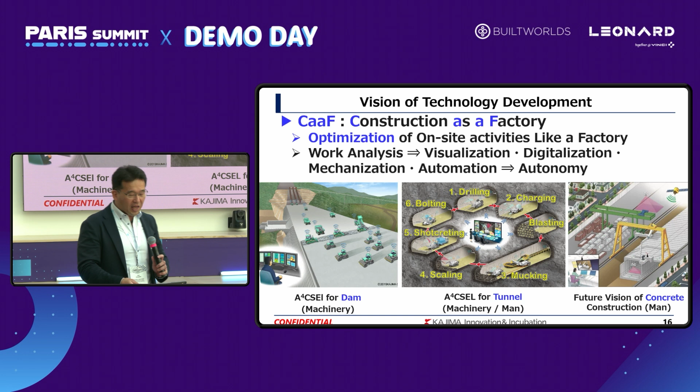For Kajima, automation is not just about replacing operators or reducing the number of people. It is about achieving optimization.

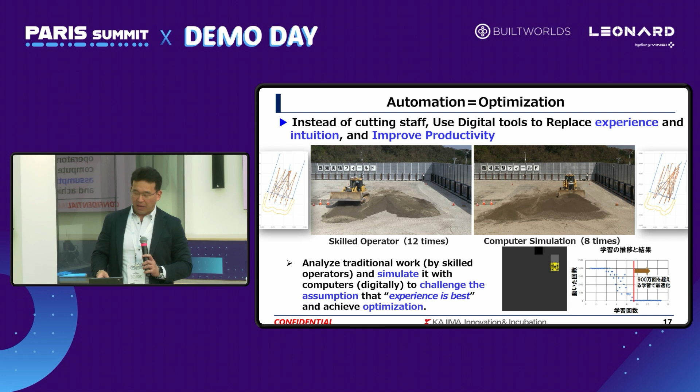For example, on the left side, a skilled operator is leveling a pile of soil, and it takes 12 passes to complete. On the other hand, on the right side, computer simulation accomplishes the same task in 8 passes. The belief that a skilled operator is the best can be challenged by computer simulation. In this case, productivity improves by 33%. This is the significance of automation.

So now let me talk about the next generation construction system, A4CSEL. A4CSEL means automated, autonomous, advanced, accelerated construction. Let me show this video. Please have a look at this.

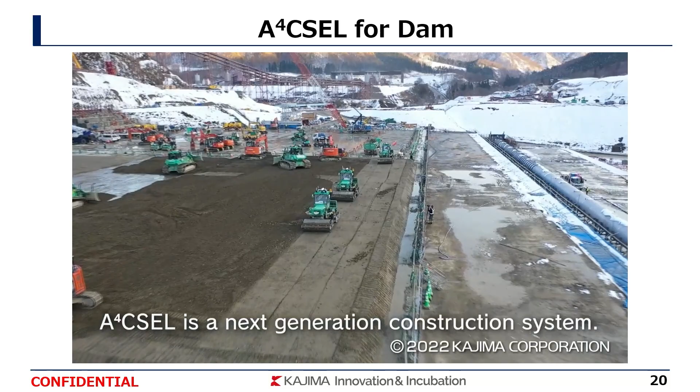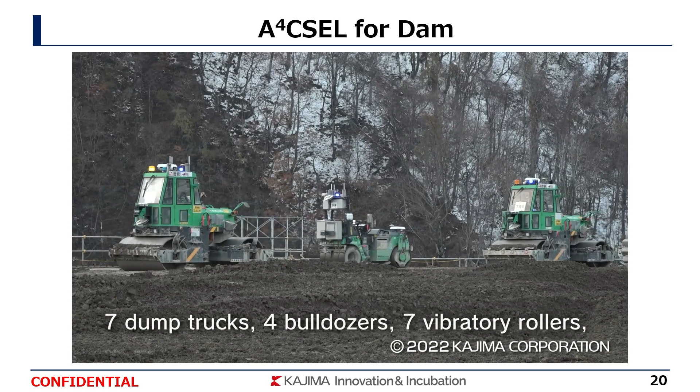A4CSEL is a next-generation construction system ensuring productivity, safety, and quality. Five different types of 23 automated heavy equipment units are used at the Naruse Dam. These heavy equipment units operate continuously, day and night. The world's first automated construction project is now underway.

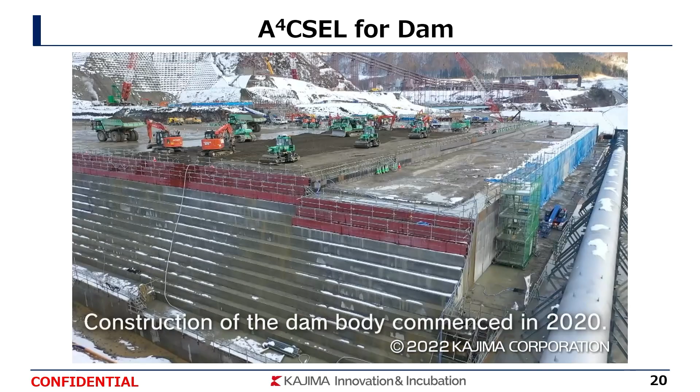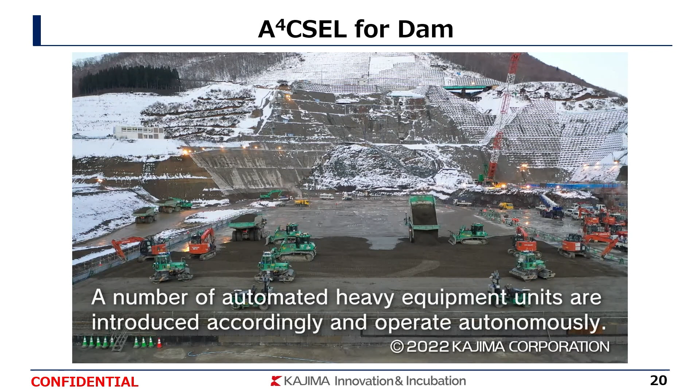The control room is the hub of automated construction. Dam body construction commenced in 2020. Automated heavy equipment is introduced in accordance with the construction process and operates autonomously in coordination and linkage with each other. Smooth construction with optimal technology maximizes productivity, and autonomous operation technology adjusts movement to meet site conditions.

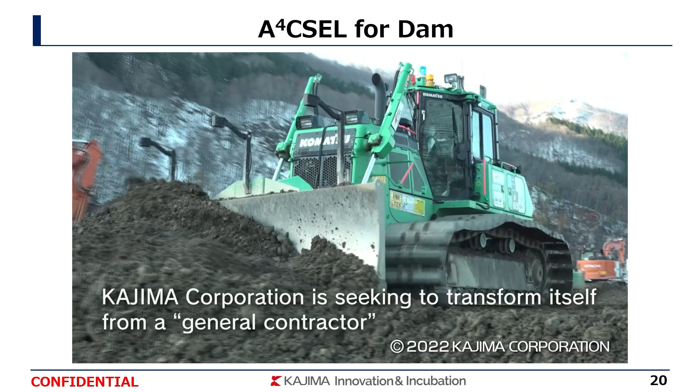Kajima Corporation is seeking to transform itself from a general contractor to an advanced IT general contractor by creating a construction site as a factory using this A4CSEL system.

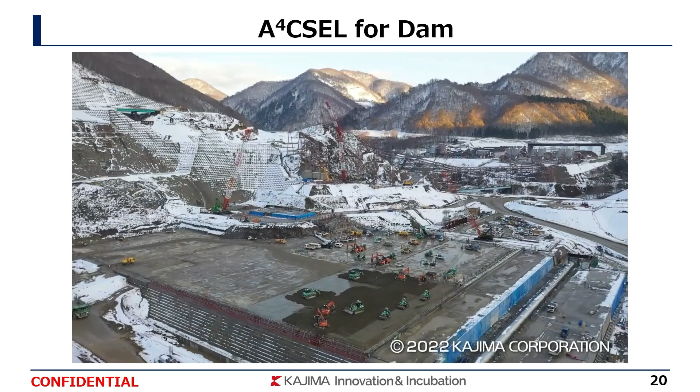Okay, so now I'm talking about A4CSEL a little more. Since 2015, we have been applying automation mainly at the dam construction site. The first 3 projects were just R&D, but A4CSEL has been applied through the entire project and completed last year as an actual project of Naruse Dam.

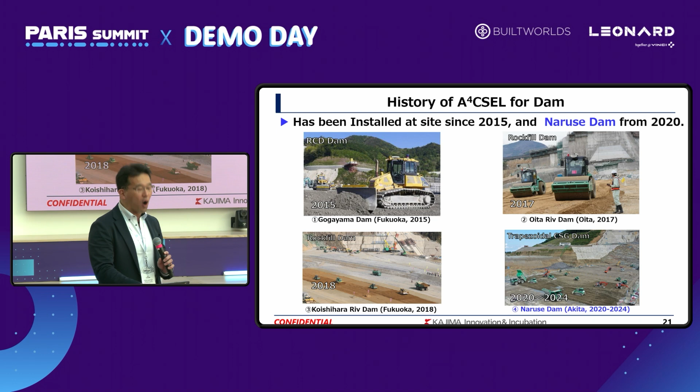Naruse Dam is located in Akita Prefecture, northern part of Japan, with a volume of approximately 4.8 million cubic meters and a height of 140 meters, which is the largest trapezoidal CSG dam in Japan. Naruse Dam is located in a heavy snowfall area, and construction is only possible from mid-April to mid-November.

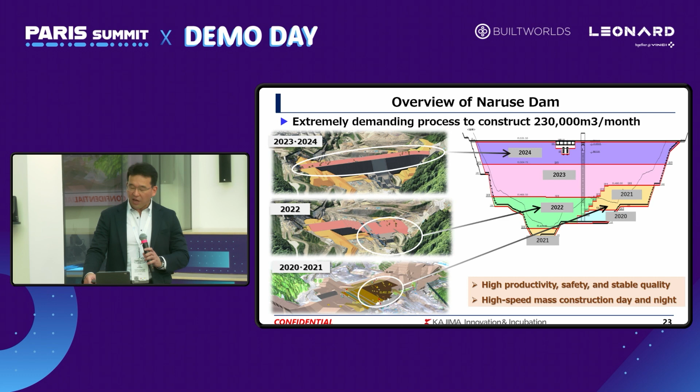To complete the project between 2020 and 2024, 230,000 cubic meters needed to be constructed monthly, making the schedule extremely tight. By applying A4CSEL, we achieved high productivity, safety, and stable quality, enabling large-scale, high-speed construction continuously, day and night. At Naruse Dam, it took up to 72 hours to construct one lift of 75 centimeters.

Automated construction achieved stable quality and high productivity. As a result, we set the Japanese record for monthly construction volume at a dam site within Japan. Its high productivity and safety were recognized by the government, and the project received the Infrastructure DX Grand Award.

In automated construction, the more machines operated by one person, the higher the labor saving rate and productivity. Unlike remote controlled operation, like radio control, where one person operates one machine, automated construction involves monitoring machines that perform pre-planned tasks automatically. This allows one person to operate multiple machines.

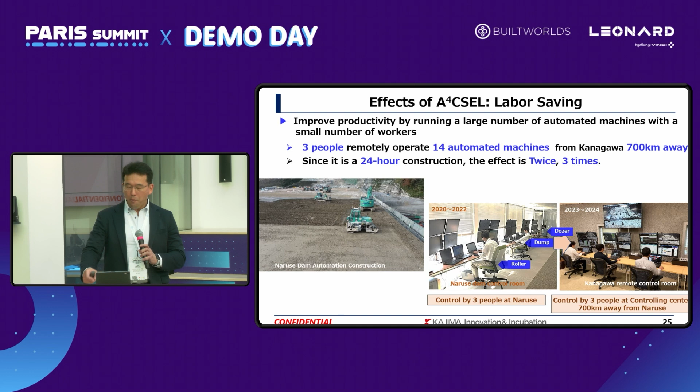At Naruse Dam, 3 people operated 14 automated machines across 3 types: dump truck, dozer, and roller. Since the machines operated 24 hours a day, productivity doubled with a 2-shift system and tripled with a 3-shift system. From 2020 to 2022, operations were controlled from a control room near the dam. However, from 2023 to 2024, operations were managed remotely from a controlling center at our head office, 700 kilometers away from the job site.

At Naruse Dam, we continuously improved work efficiency by implementing the PDCA cycle. As a result, automated bulldozer achieved approximately twice the speed of manual operation in leveling tasks. This allows for a reduction in the number of machines used compared to manual work, or enables smaller size machines to be used with the same number of units.

Automated construction has an effect on reducing CO2 emissions as well. Since automation construction optimizes the paths taken by heavy machinery, it requires less movement compared to manned operations, which reduces fuel consumption and suppresses CO2 emissions. Both fuel consumption and amount of work travel are 30% lower in automated operations compared to manned operation.

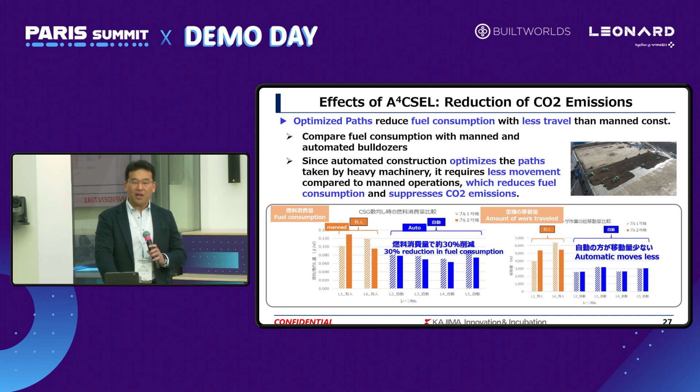Automated construction was applied to a disaster recovery site outside of the dam project. The work involved constructing a sediment control dam directly below a large-scale collapsed slope caused by heavy rain. Entering the area directly below the slope was prohibited, and the project was issued with a condition of remote-controlled construction. Remote-controlled machinery or radio-controlled operation is inefficient, achieving only about 60 to 70% of the productivity of manual work. In response, automated bulldozer and automated vibrating rollers were introduced for backfilling work behind the concrete retaining wall, significantly improving the efficiency.

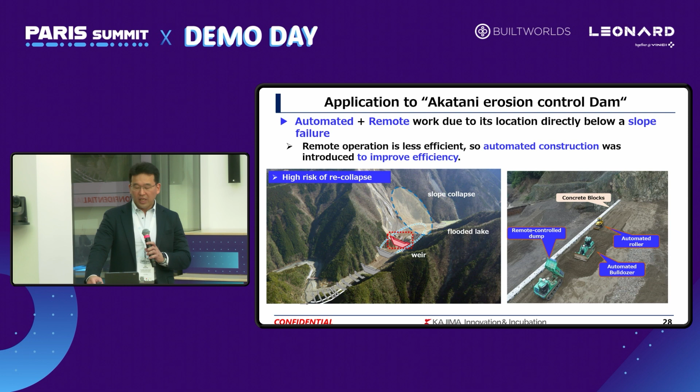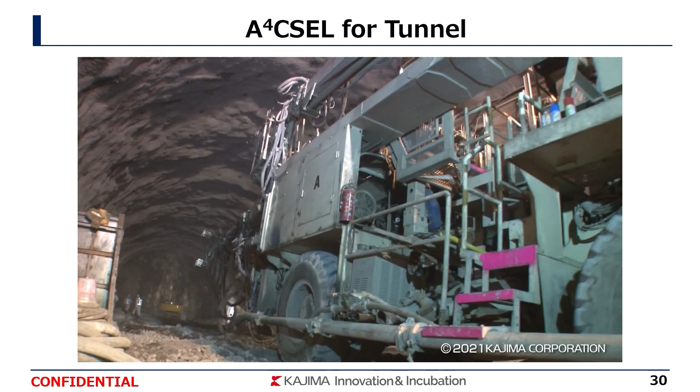So let me talk about the tunnel. Please have a look at this video as well. Manual operations are still inevitable at the tunnel face, where there is always the danger of collapsing. KAJIMA has been moving forward with the mechanization and automation of 6 construction steps, excluding charging, which are all critical for tunnel excavation.

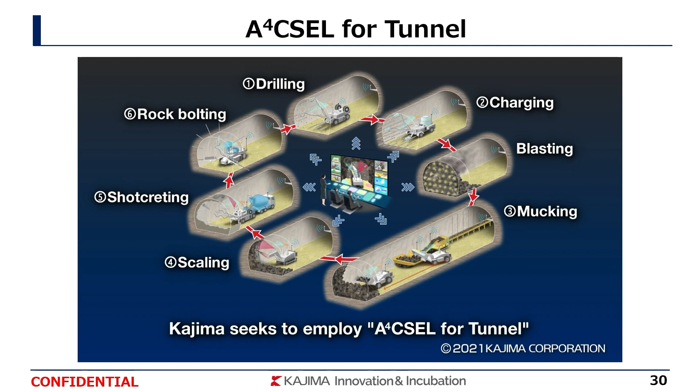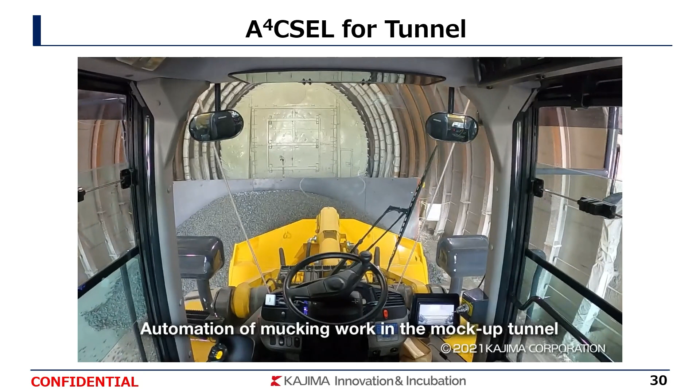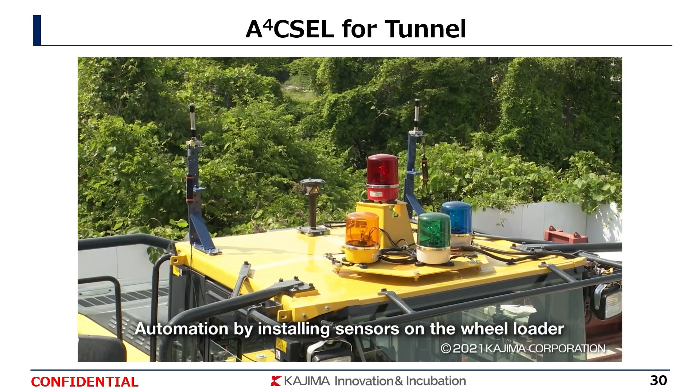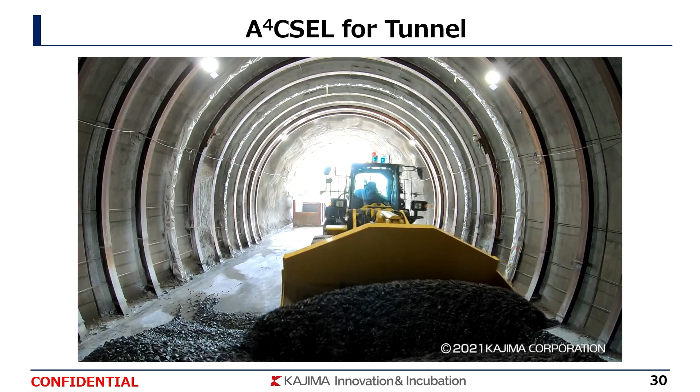A wheel loader with laser sensors made automated mucking operation possible, even in a non-GPS environment. In-house GPS and SLAM with laser sensors could detect the self-positioning and facilities around the machine in real time. The automated wheel loader can insert its bucket into the muck pile and scoop it. Then it travels backward to the hopper, and there it turns its wheel quickly and dumps the muck into the hopper.

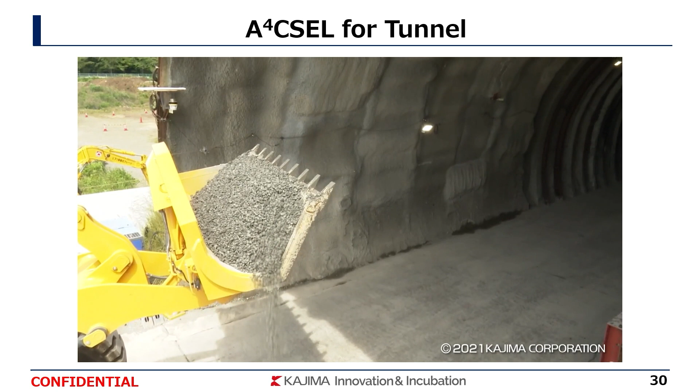In actual construction work, the average mucking operation requires 50 to 70 round trips for an average 50 meters between the face and the hopper, but automation frees the operator from long, arduous hours of work.

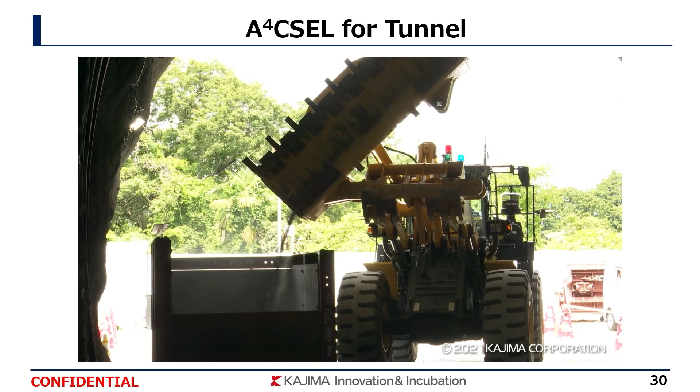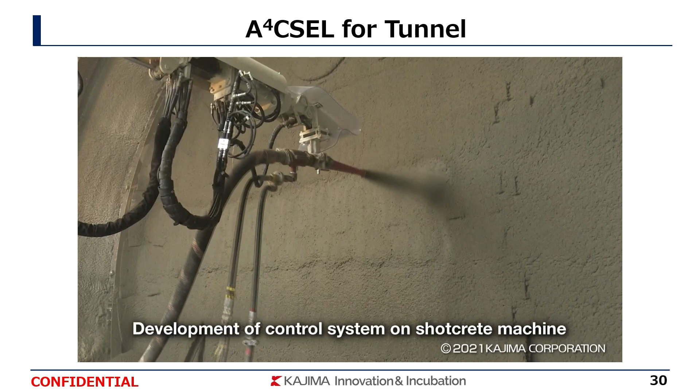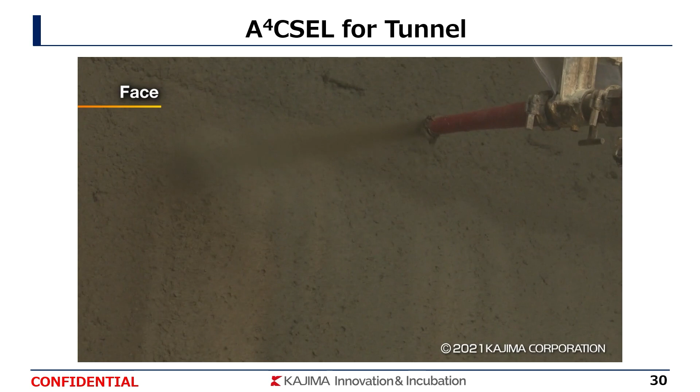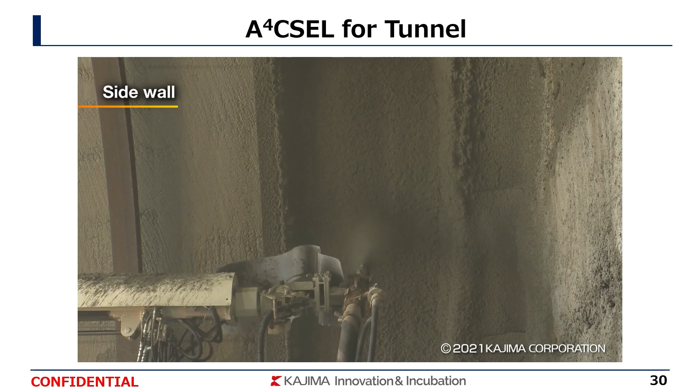KAJIMA has developed an automated shotcrete machine and nozzle operating system, which can be controlled with an optimum plan, which understands the basic spray test data and can create an optimum spraying procedure based on the sprayed surface condition. This automated shotcrete system can control the nozzle operation according to not only the surface condition, but also different types of sprayed surfaces, such as the tunnel face, the backside of the steel support, and side wall. This automated shotcrete system can spray the concrete with a 2 centimeter accuracy of thickness.

A4CSEL for Tunnel has been still under development. In phase 1, development was carried out in a simulated tunnel, but in phase 2, we dug an actual real test tunnel ourselves and have been developing the technology.

In addition to the wheel loader and shotcrete, we have developed drilling, charging, and blasting automation. Its productivity has been improved by 20%.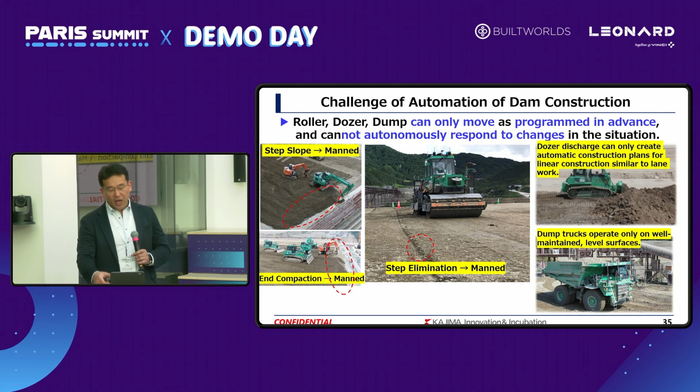So we have achieved significant progress at Naruse Dam. However, we still have to have manned operation, for example step slope, end compaction, step elimination. Also, dozer discharge can only create automatic construction plans for linear construction similar to lane work. Dump trucks operate only on well-maintained level surfaces. So roller, dozer, dump can only move as programmed in advance and cannot autonomously respond to changes in the situation.

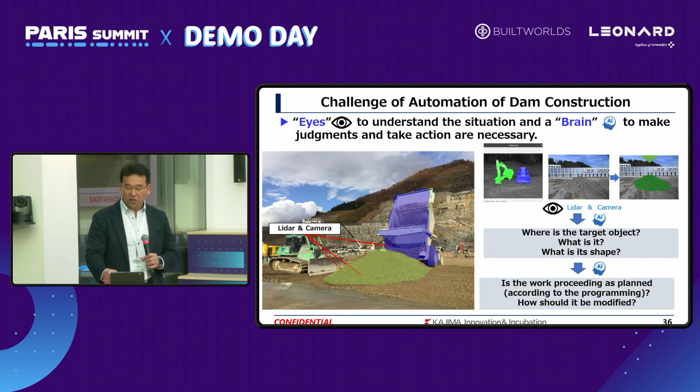So in order to improve these challenges, we need eyes and brain. When this dozer sees the object, it has to think, where is the target object? What is it? What is its shape? Simultaneously, when the dozer judges the works, it has to think, is the work proceeding as planned? How should it be modified? Therefore, it is necessary to have eyes to understand the situation and the brain to make judgments and to take action.

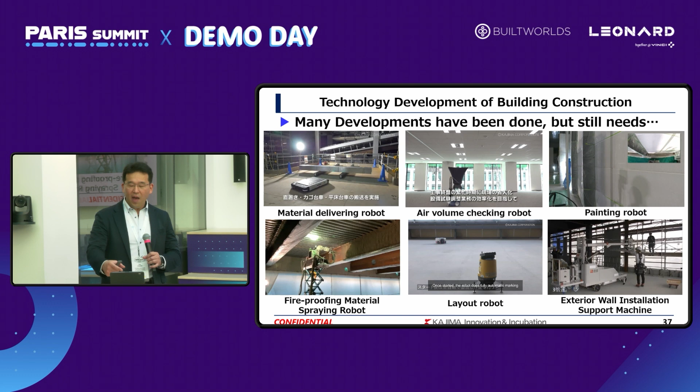So we have also been working on the development of robotics for building construction like this. However, because they do not have eyes and brain, it still requires human intervention. So the key point here is that the environment of a job site continues to change frequently. The task is not coming in front of the robot like in a factory. A robot must go to some specific area to do something accordingly. Therefore, robots absolutely need autonomous eyes and brain, which leads to automation.

So KAJIMA has been developing technology like A4CSEL and robotics mostly in-house. However, creating eyes and brain is beyond what a construction company like us can do. This is why open innovation is mandatory. For example, we made a deal with Field AI spun out from NASA JPL with cutting-edge autonomous controlling technology. This technology is revolutionary as it can autonomously control not just quadruped-type robots, but any mobile-type device. By integrating this control technology into A4CSEL and robotics, we aim to achieve true autonomy, and we are currently working on it.

So let me wrap up. The introduction of A4CSEL makes it possible to operate multiple sites remotely. Moving forward, we aim to widely promote A4CSEL and transition from decentralized management at individual sites to centralized management through remote control centers, contributing to solving challenges in the construction industry. This will enable optimal placement and assignment of construction machinery and workers, leading to labor saving and improvement in working conditions. With no people present at the work site, labor accidents will be completely eliminated, ensuring safety, standardization of work, optimization of construction plans, and project schedules will improve productivity and reduce CO2 emissions.